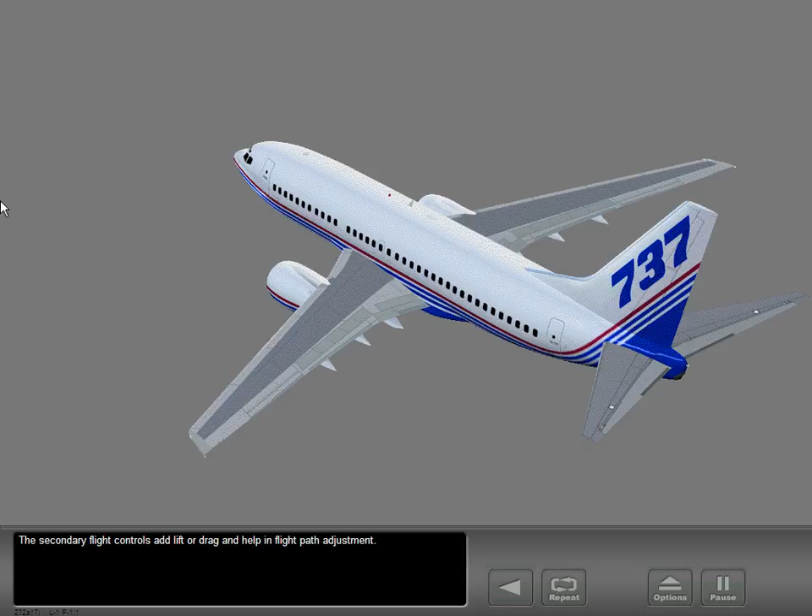The secondary flight controls add lift or drag and help in flight path adjustment. The spoiler's speed brakes help roll the airplane, add drag to slow the airplane, or increase the rate of descent. The leading edge devices add lift for slower approach and landing speeds. The trailing edge flaps also add lift and drag for slower approach and landing speeds.

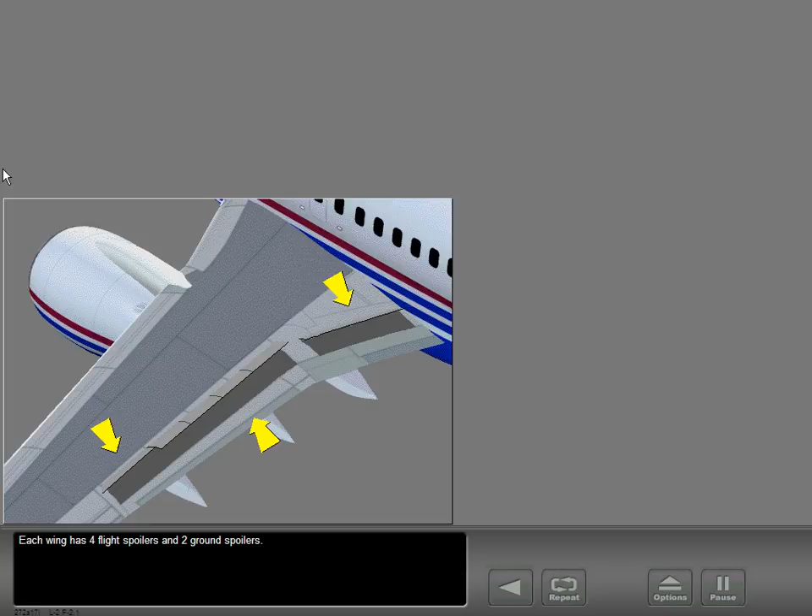Each wing has 4 flight spoilers and 2 ground spoilers. The flight spoilers are operated manually in flight to slow the airplane or increase the rate of descent, or automatically to help the ailerons in roll control.

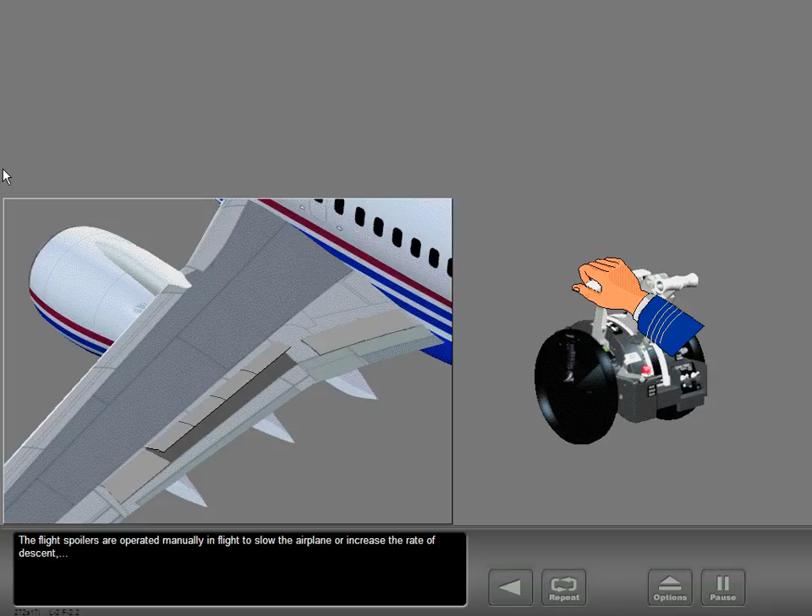You must be careful when you operate the flight spoilers manually and the airplane is turned. The airplane roll rate can quickly increase.

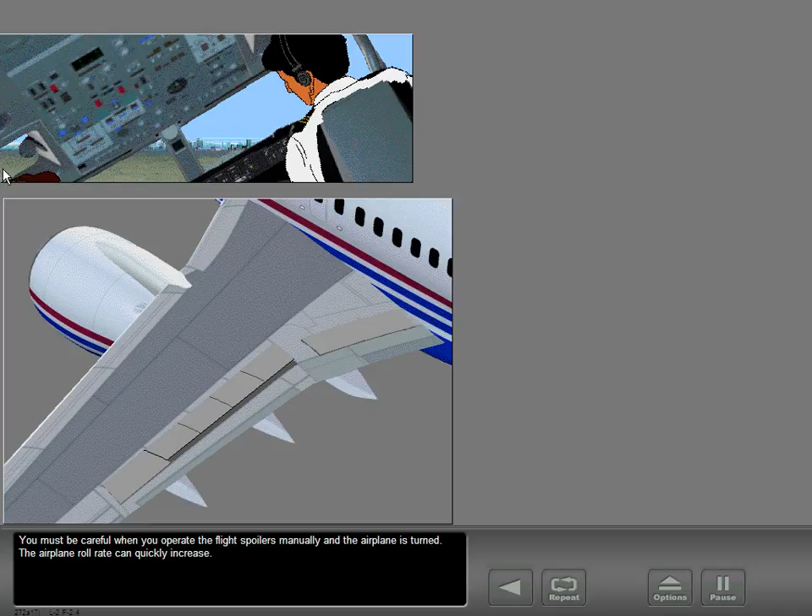The ground spoilers operate with the flight spoilers on the ground. The flight spoilers use hydraulic systems A and B. The ground spoilers use hydraulic system A.

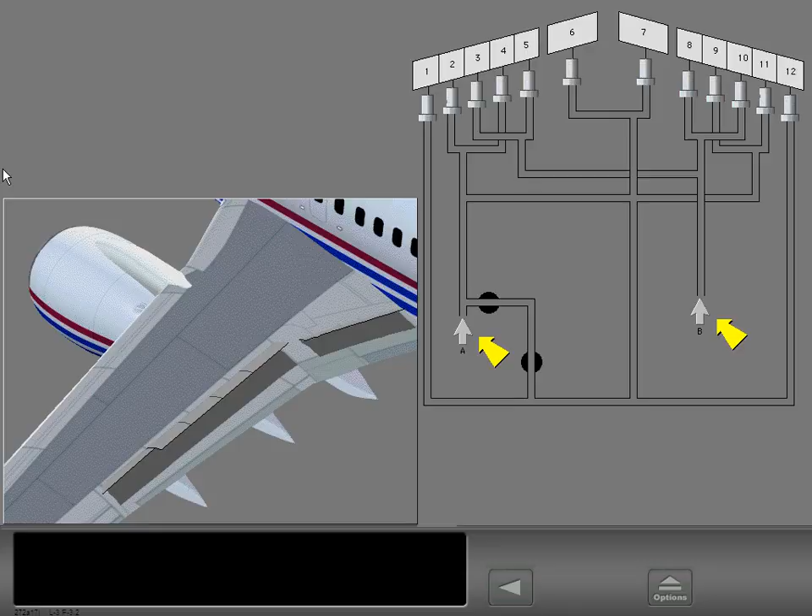The controls and indicators for the spoiler speed brakes are found here. The speed brake lever is on the captain's side of the control stand.

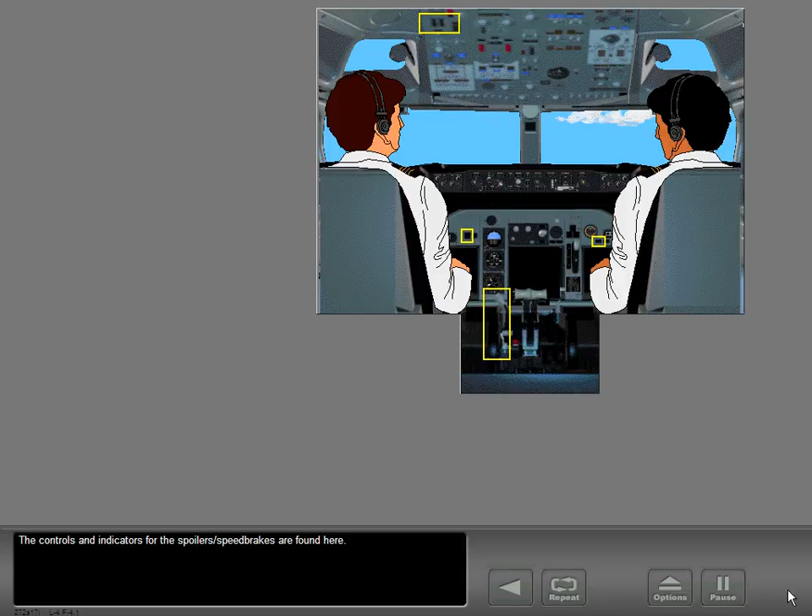In the down detent position, all flight and ground spoiler panels are down. The armed position is for automatic operation. In the flight detent position, all flight spoilers extend to the maximum position.

In the up position, all flight and ground spoilers extend to their maximum position. The up position is used only on the ground.

The speed brake armed light is on the captain's instrument panel and shows that the speed brake system is armed for automatic inputs.

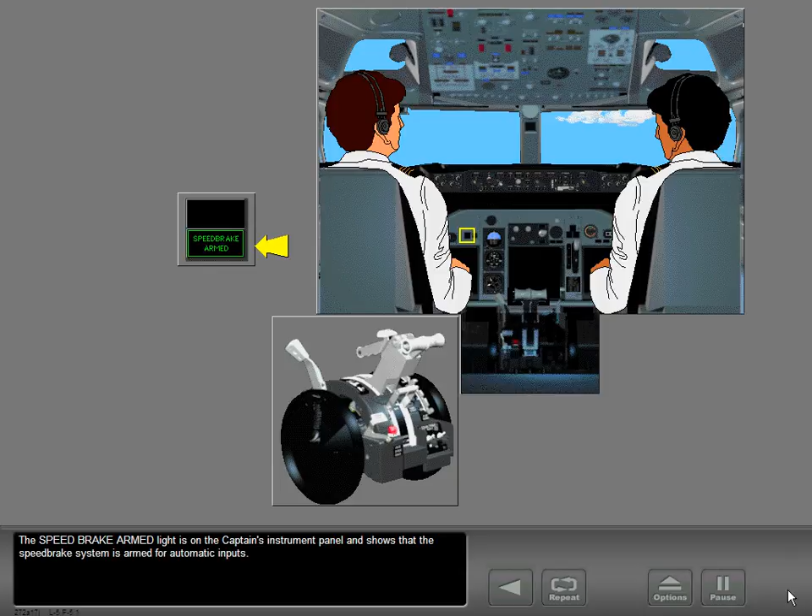The speed brake's extended light on the first officer's instrument panel illuminates in flight when the speed brake lever is out of the armed position and the trailing edge flaps are extended to more than flaps 10, or radio altitude is less than 800 feet.

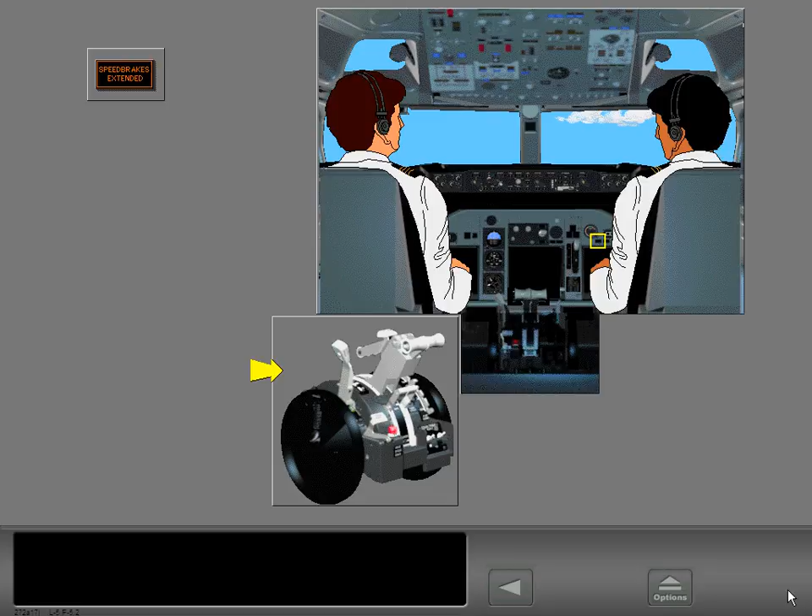The speed brake's extended light illuminates on the ground when the speed brake lever is in the down detent position and the ground spoilers are not stowed.

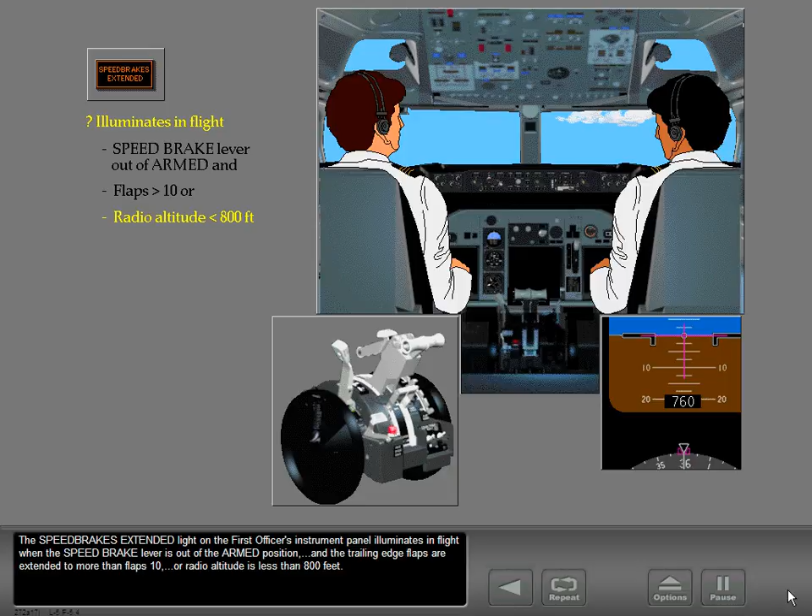The spoilers are set to operate automatically on landing or during a rejected takeoff. To operate automatically on landing, you must have the speed brake lever in the armed position and the speed brake armed light illuminated.

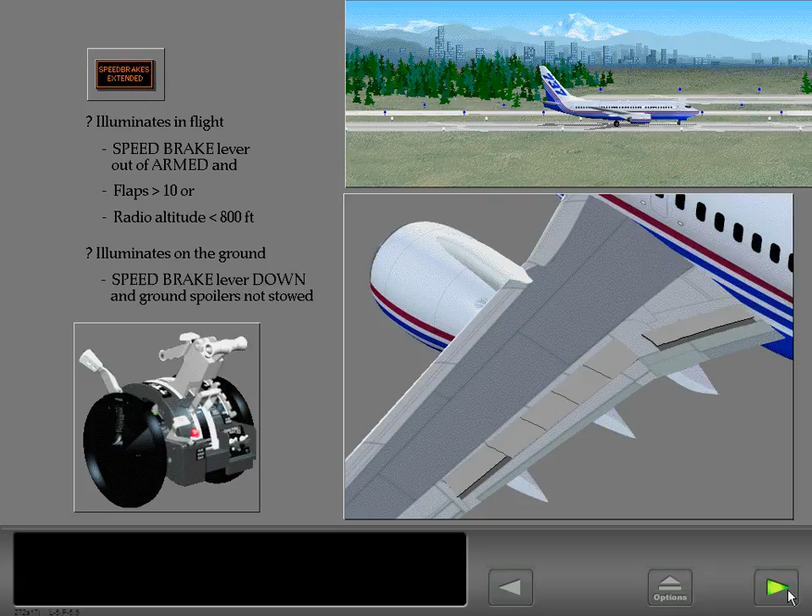The thrust levers in the idle position, a main landing gear wheel speed of more than 60 knots, and a landing gear strut compression.

When the left main, right main, or nose gear strut compresses, the flight spoilers move up. When the right main gear strut compresses, the ground spoilers move up.

During a rejected takeoff, all spoilers operate if the main landing gear wheel speed is more than 60 knots. The thrust levers are in idle, and the reverse thrust levers are moved to reverse thrust.

The spoiler switches on the flight control panel are for maintenance use only.

The leading edge devices and trailing edge flaps are high lift devices that increase wing lift and decrease stall speed during takeoff, low speed flight, and landing.

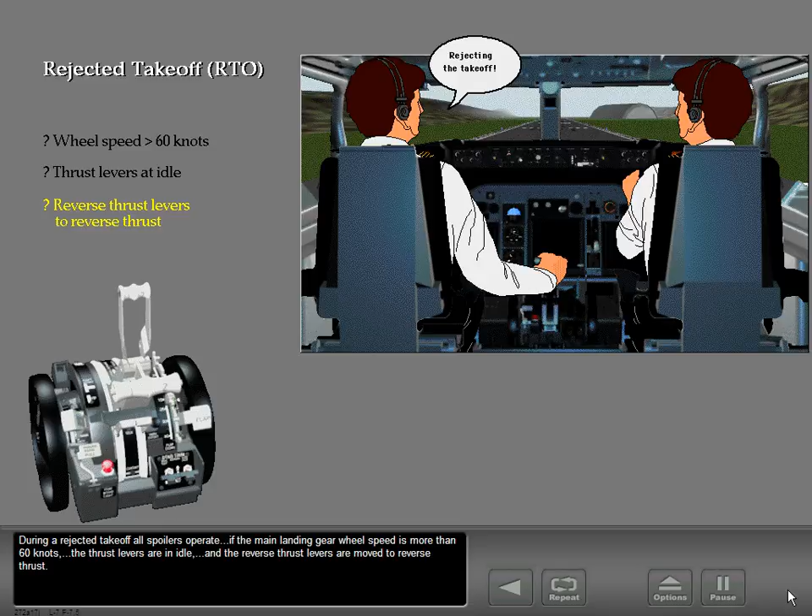The leading edge devices are the leading edge flaps, which have two positions, up and full extended. And the leading edge slats, which have three positions, up, extended, and full extended. The trailing edge flaps are double slotted.

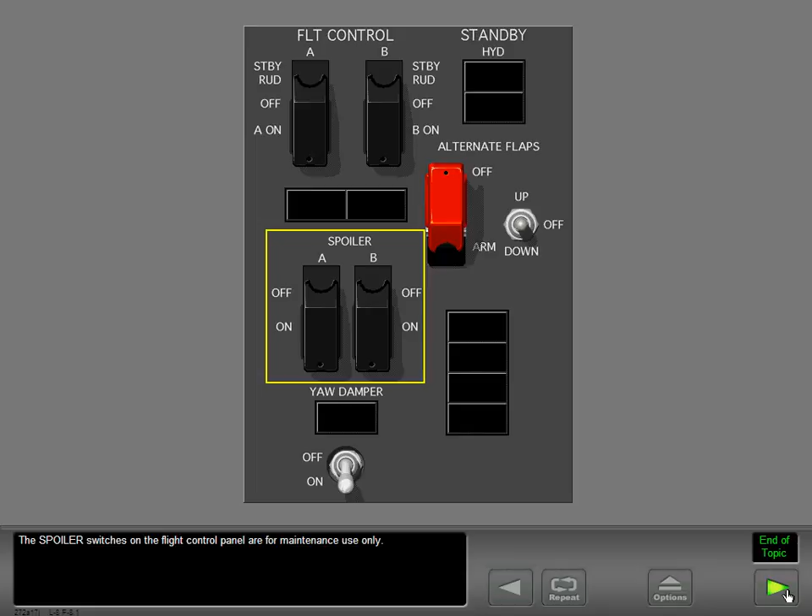Extension of the leading edge devices occurs in sequence with the movement of the trailing edge flaps. The leading edge devices and trailing edge flaps use hydraulic system B.

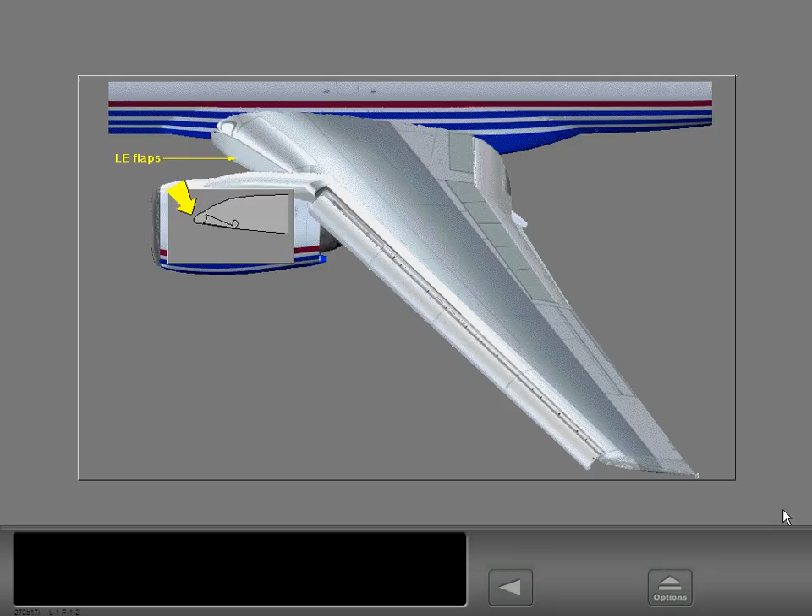The standby hydraulic system is the alternate source for extension of the leading edge devices. An electrical motor is the alternate system for extension and retraction of the trailing edge flaps. Alternate flap and slat operation is discussed in a different lesson.

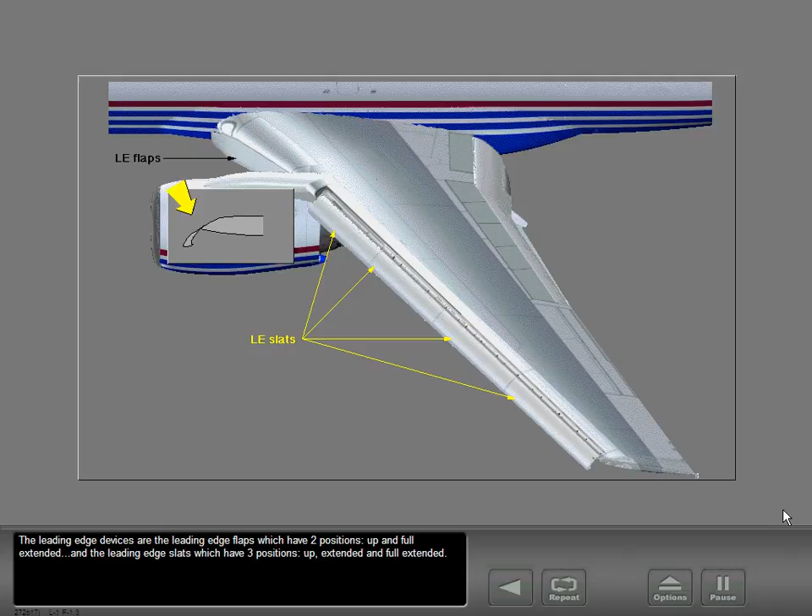The flap lever is on the first officer's side of the control stand. When the flap lever moves, the trailing edge flap control and leading edge control operate, and hydraulic pressure goes to the trailing edge drive unit and the leading edge slats.

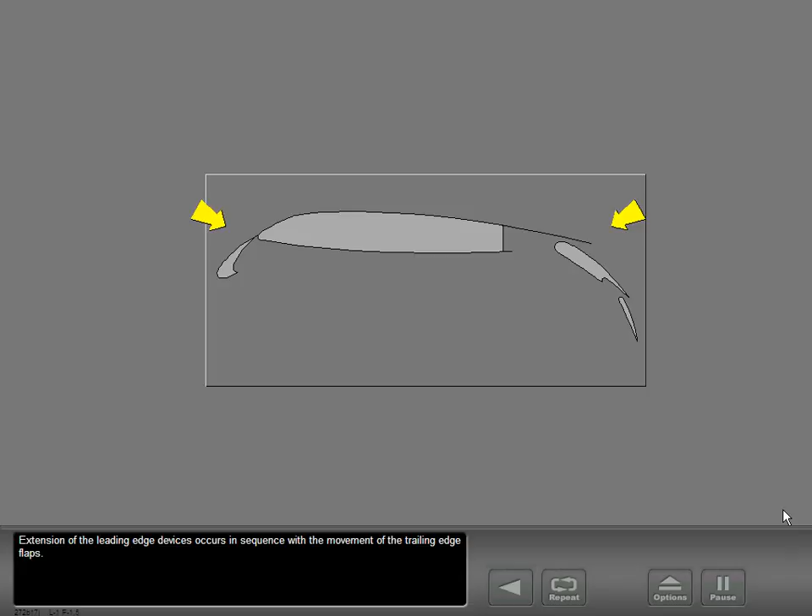The flap position indicator shows the trailing edge flap positions. Flap gates prevent accidental movement through position 1 during a single engine go-around and position 15 during a normal go-around. The flap's limit placard shows the maximum speed for each flap position.

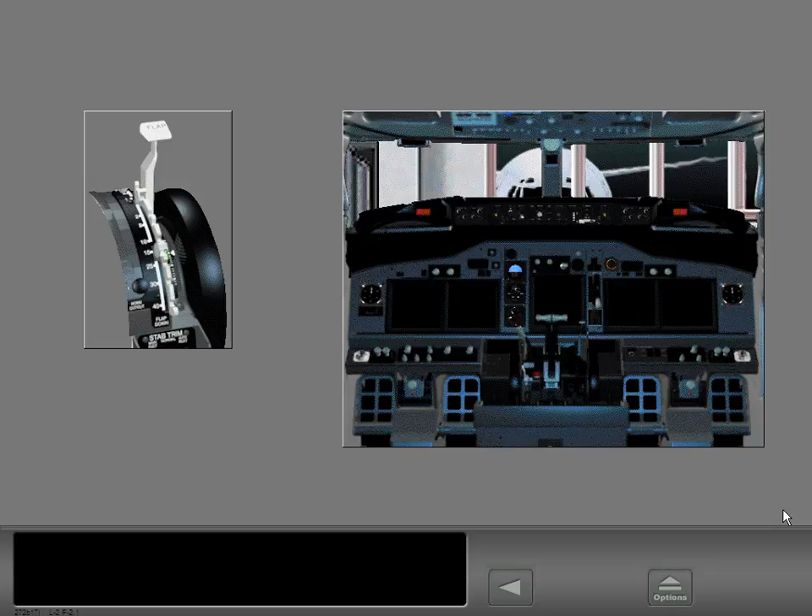The Flap Slat Electronics Unit, or FSEU, supplies trailing edge flap load relief from higher than normal airspeed for flaps 40 and 30. The FSEU tells the flaps to retract from 40 to 30 if the airspeed is more than 163 knots.

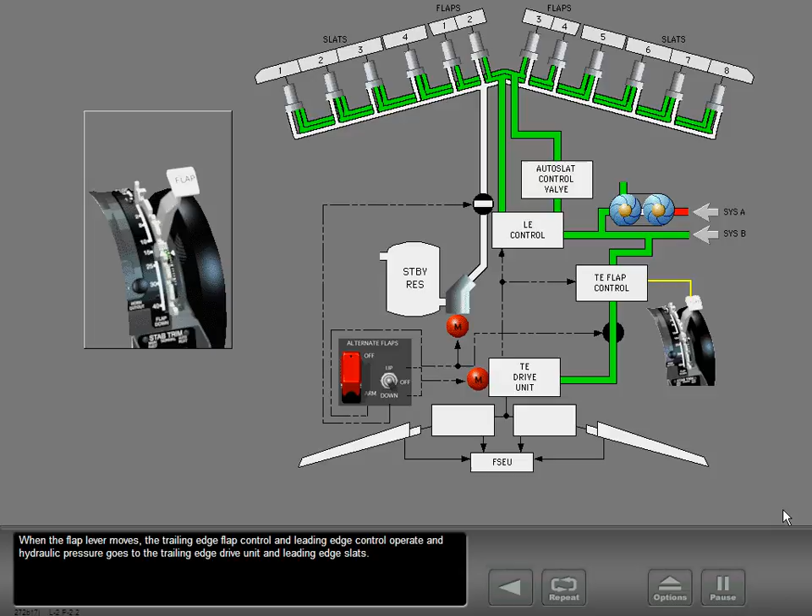When the flap lever is set to 30, the flaps retract to 25 if the airspeed is more than 176 knots. The flap lever does not move, but the flap position indicator shows the retracted position.

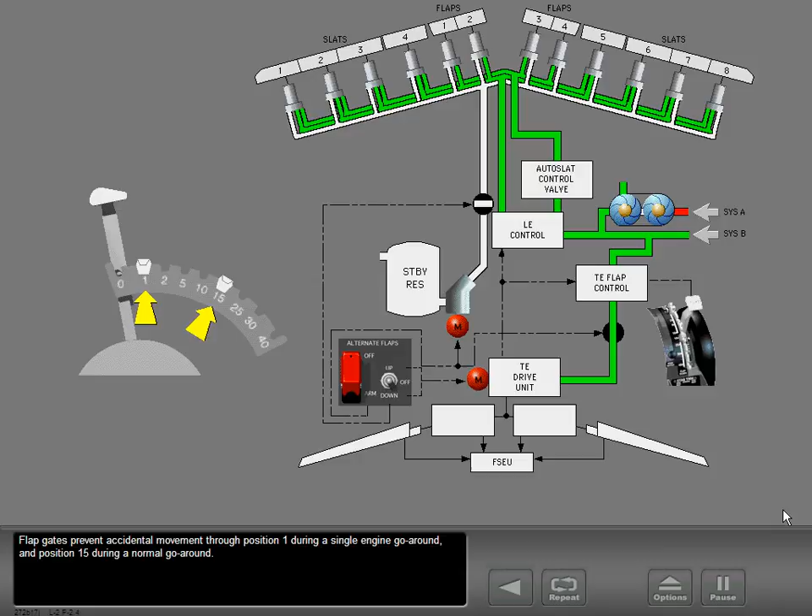The flaps extend to the set position when the airspeed decreases below 158 knots for flaps 40 or below 171 knots for flaps 30.

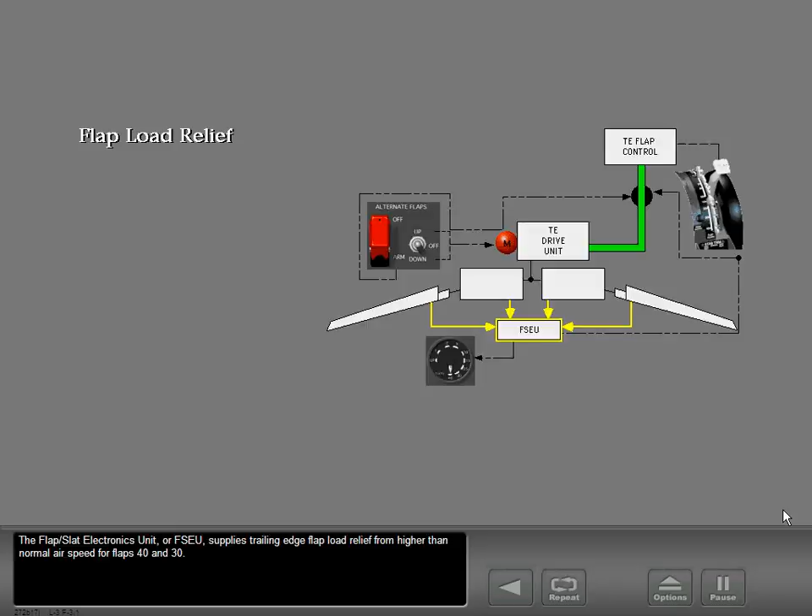Indications for the leading edge devices are on the center instrument panel and the aft overhead panel. The leading edge devices annunciator panel shows the position of each leading edge flap and slat. The leading edge flap transit and extended lights show the condition of the leading edge devices.

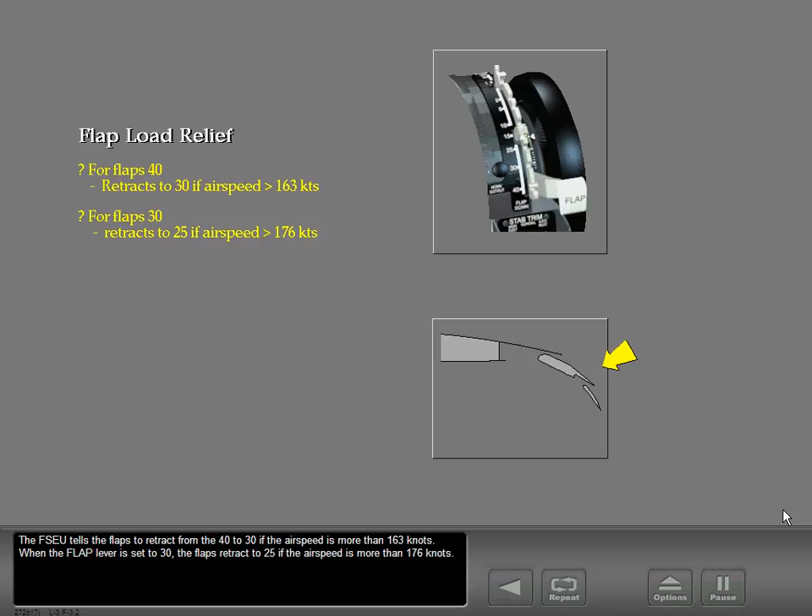When all the lights extinguish, the devices are retracted. The amber leading edge devices transit lights and leading edge flaps transit light illuminate when the leading edge devices are in transit or not in the correct position.

The green leading edge devices extended or full extended lights illuminate when the leading edge devices are in the correct position.

The leading edge flaps extended light illuminates when the leading edge flaps are in the full extended position and the slats are in the extended position. Or the leading edge flaps and slats are in the full extended position.

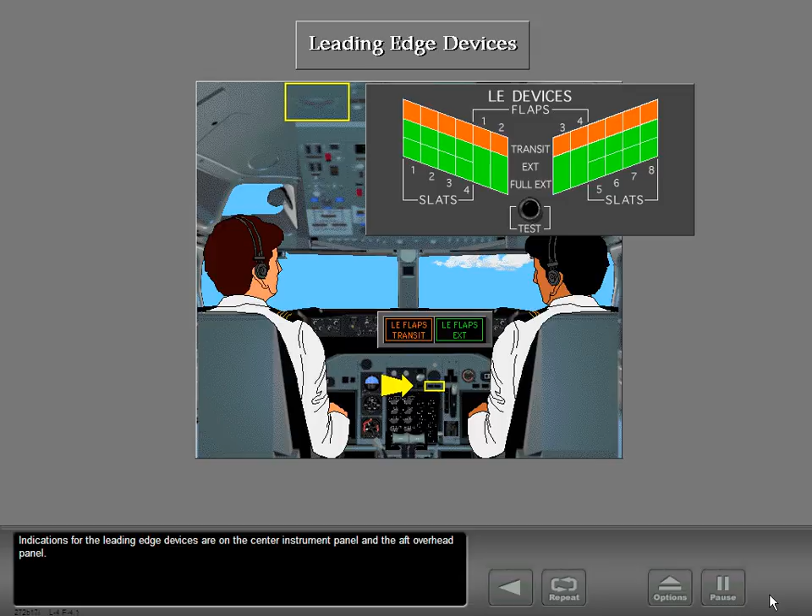Push and hold the test switch. The test switch illuminates all annunciator panel lights.

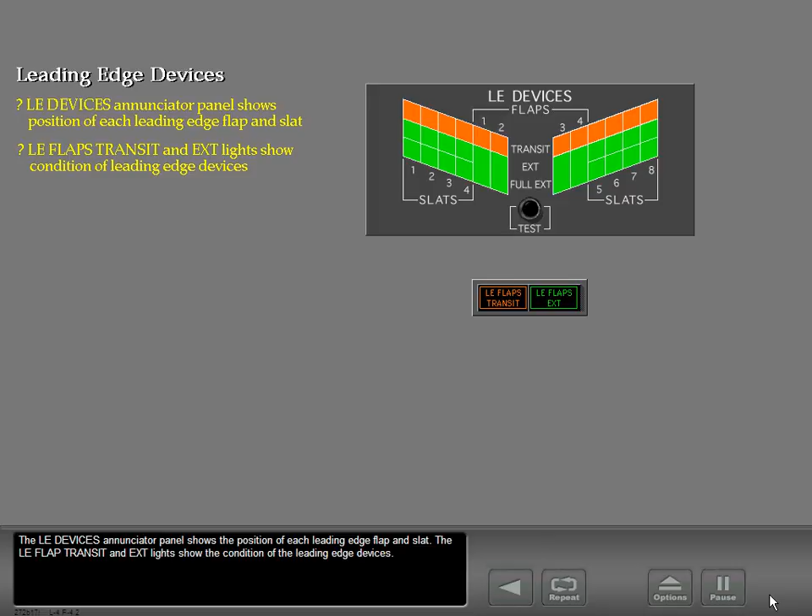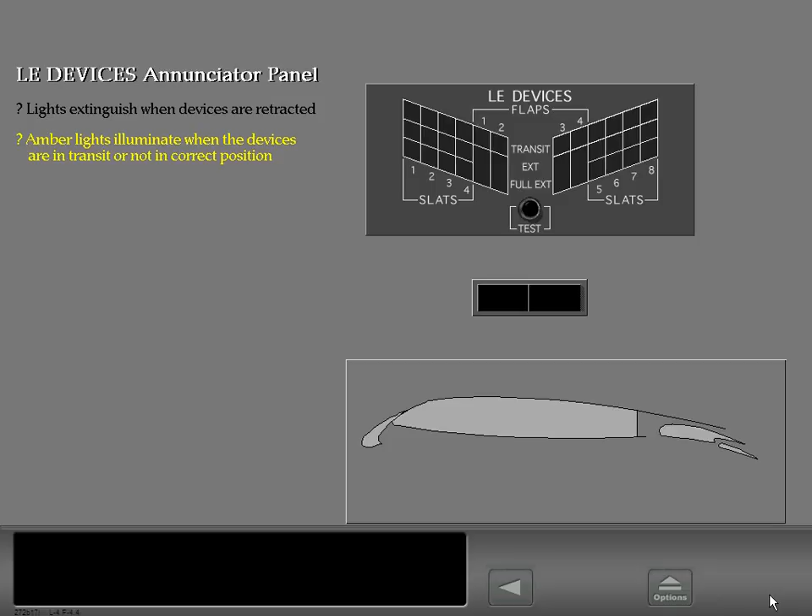The auto-slat system increases wing lift if the airplane approaches a stall during takeoff or approach to landing. With the trailing edge flaps set at 1, 2, or 5, the auto-slat system moves the leading edge slats from extended to the full extended position before stick shaker. The slats move back to the extended position when the pitch angle is below the stall attitude.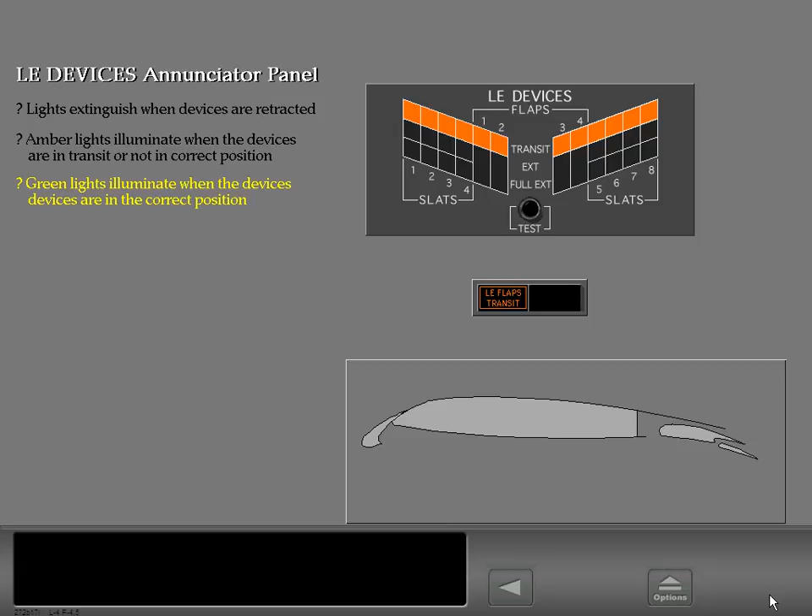The auto-slat system uses hydraulic system B. If pressure from the hydraulic system B engine-driven pump is not sufficient, the power transfer unit, or PTU, uses hydraulic system A to pressurize system B for auto-slat operation.

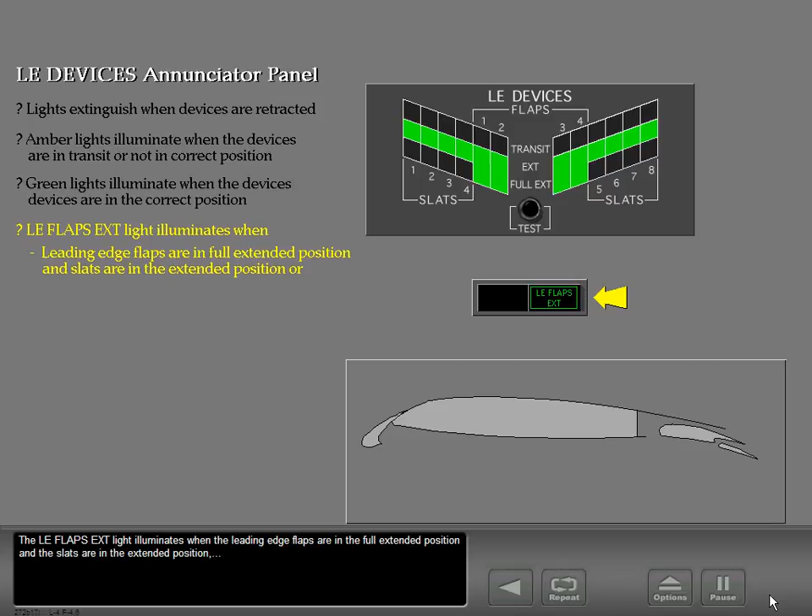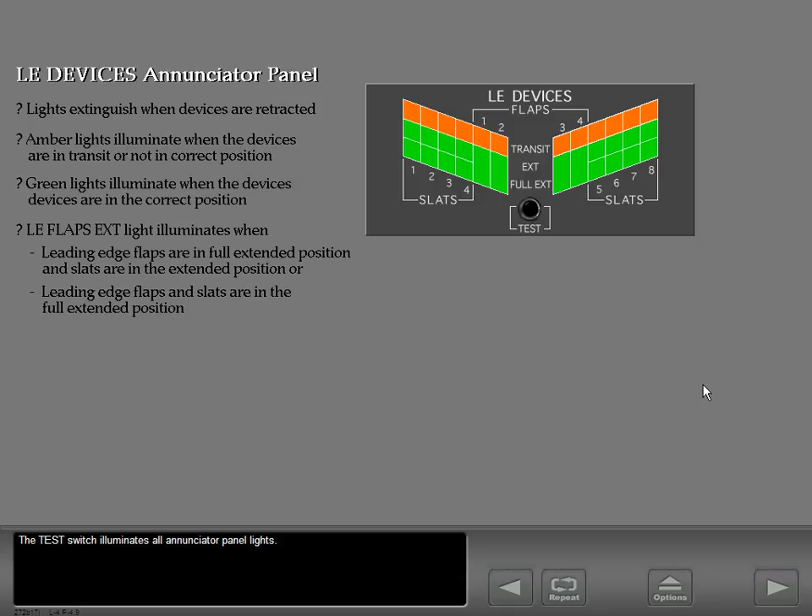Let's look at a flap extension sequence. Set flaps 5. When the flap lever is set at 5, the trailing edge flaps move from the up position and the leading edge devices start to extend. The leading edge flaps transit light and leading edge devices transit lights illuminate. When the trailing edge flaps near the 1 position, the leading edge flaps are at full extended. The slats are at extended, and the leading edge flaps extended light illuminates.

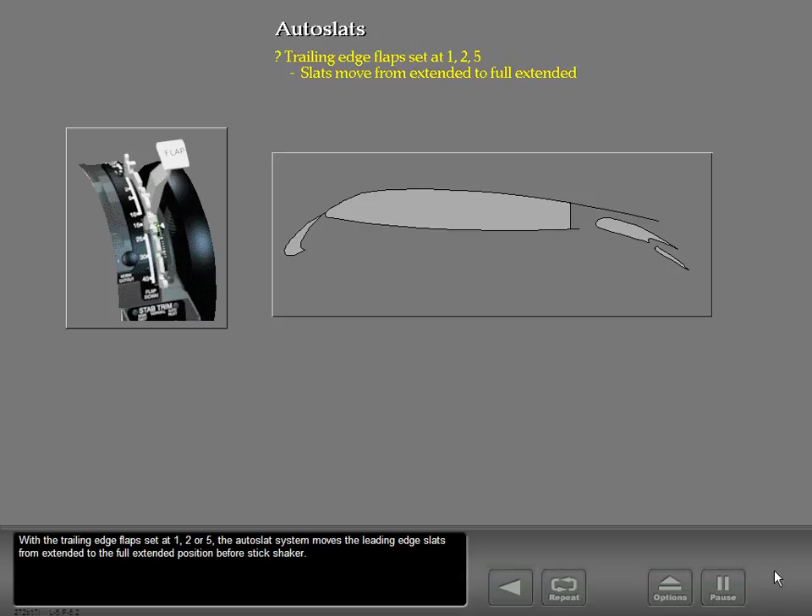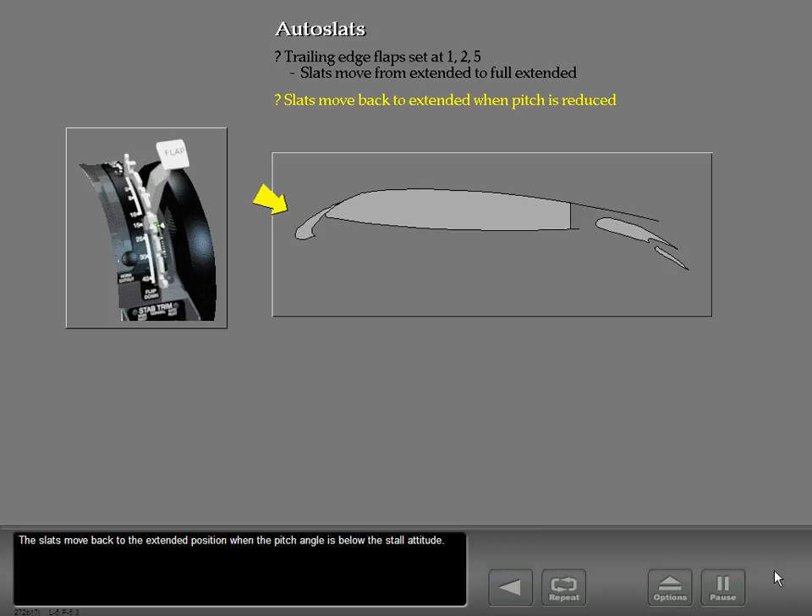Set flaps 40. When the trailing edge flaps move from flaps 5 to flaps 10, the slats move to full extended. The lights again show in transit and then full extended. Only the trailing edge flaps continue to extend from flaps 10 to flaps 40.

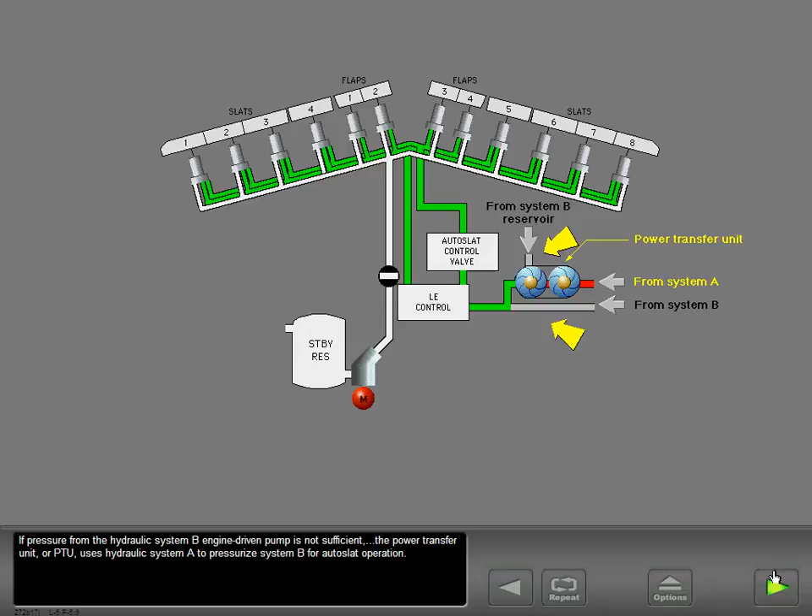Let's look at the non-normal conditions related to secondary flight controls. The speed brake do not arm light is on the captain's instrument panel and shows the automatic speed brake system is inoperative. During the landing roll, you must manually move the speed brake lever to up.

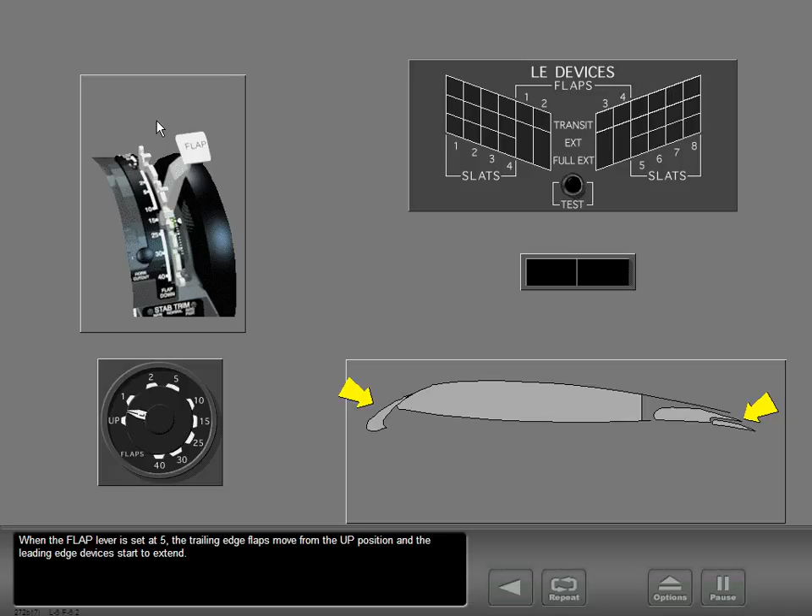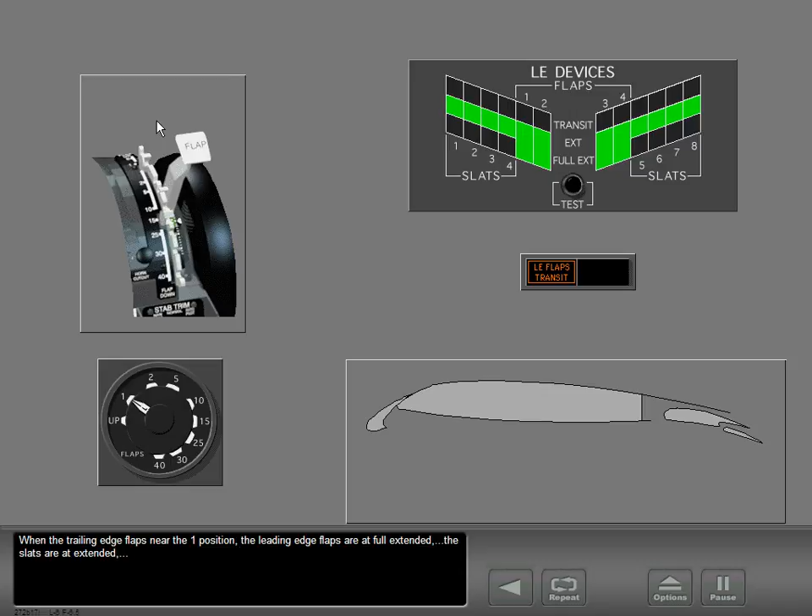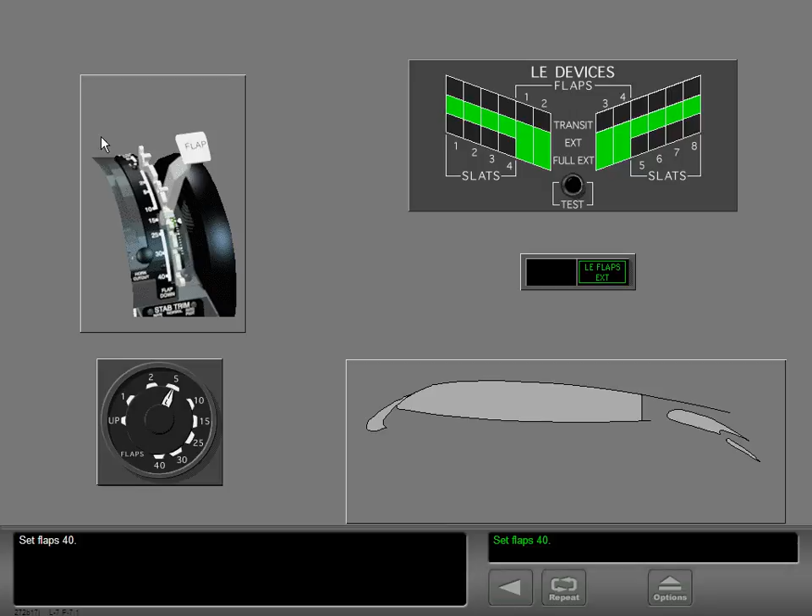The auto-slat fail light illuminates when the auto-slat system is not available. The flight controls system annunciator and master caution lights illuminate. Reset the master caution system. A failure of a single SMYD channel illuminates the auto-slat fail light, flight controls system annunciator, and master caution lights when the master caution system recall is activated. No crew action is required for an auto-slat system failure.

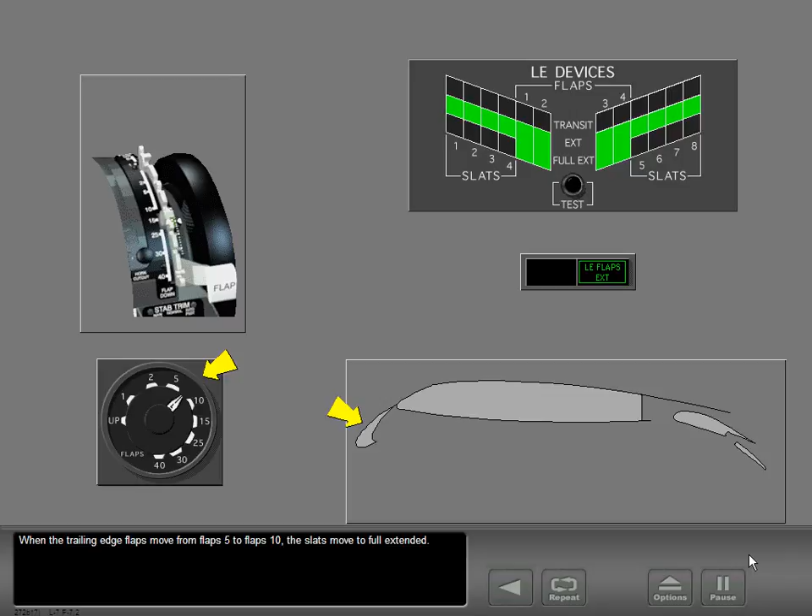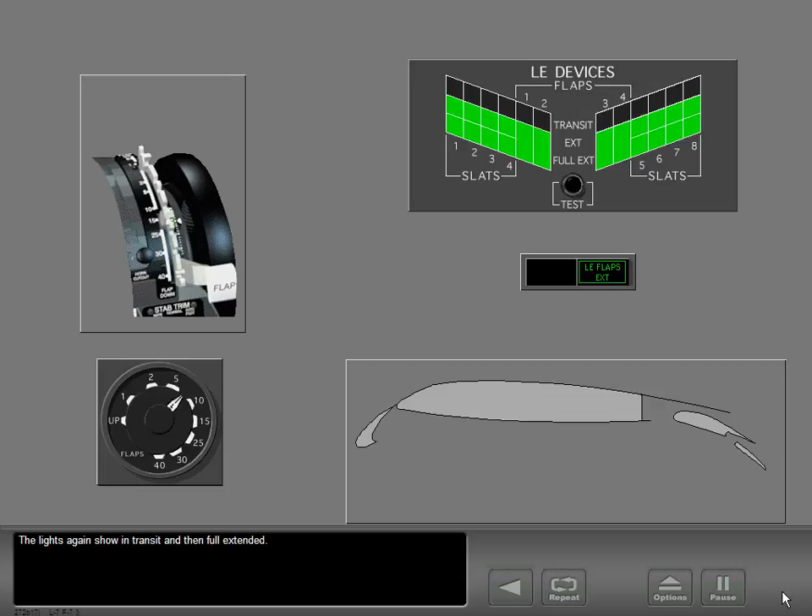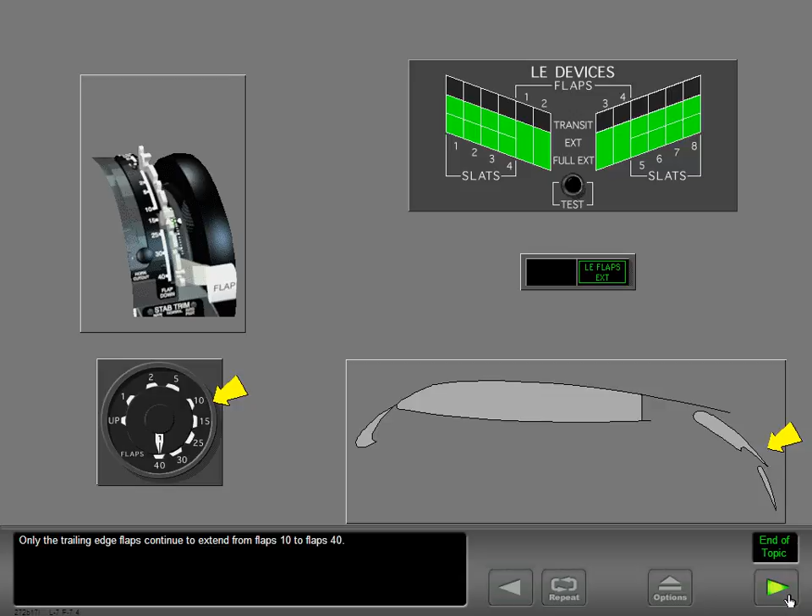If hydraulic system B does not operate, the standby hydraulic system is the alternate source for extension of the leading edge devices, while an electrical motor is the alternate system for extension and retraction of the trailing edge flaps. The alternate flaps master switch and position switch control the alternate flap system.

Open the guard and move the master switch to arm. When the alternate flap master switch is in the arm position, the alternate flaps position switch is armed. The standby hydraulic pump turns on, and the trailing edge flap bypass valve closes.

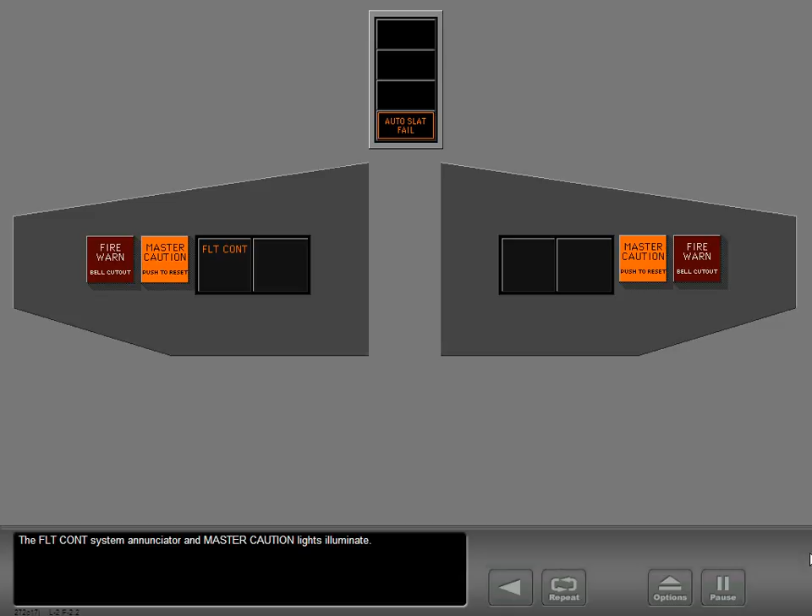Next, move the alternate flaps position switch to down. In the down position, the standby hydraulic system moves the leading edge flaps and slats directly to the full extended position, while an electric motor extends the trailing edge flaps. The down position is spring-loaded and must be held until the flaps reach the correct position.

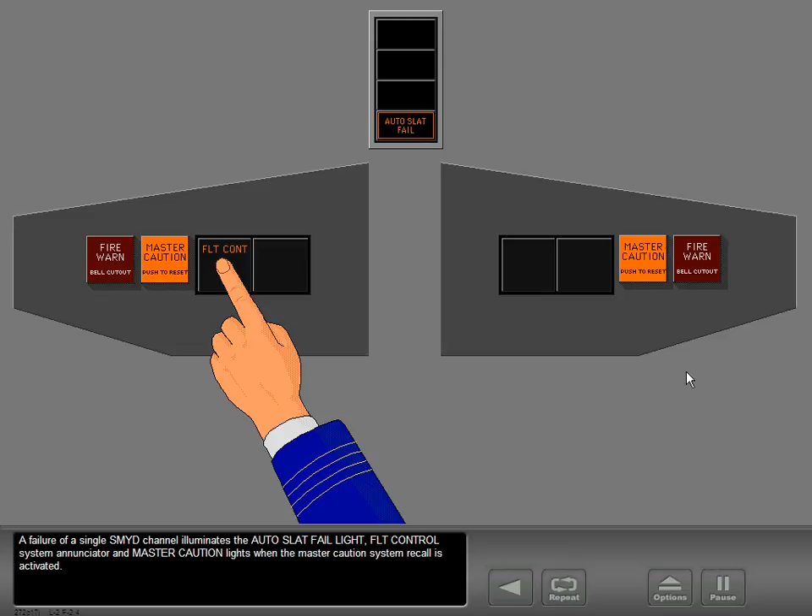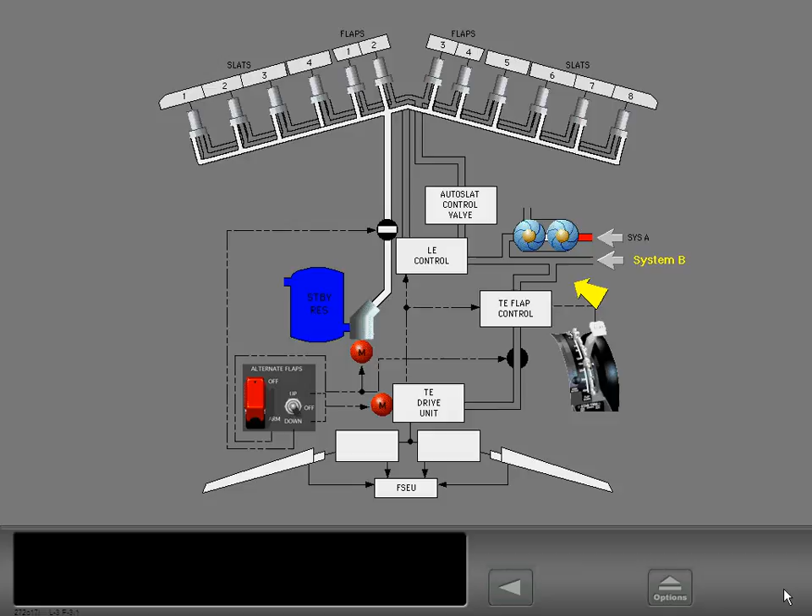Trailing edge flap extension is slow and can be as long as 2 minutes for the flaps to move from up to flaps 15. To retract the trailing edge flaps, move the alternate flaps position switch to up. The up position is magnetically held. Leading edge flaps and slats stay fully extended and cannot be retracted by the standby hydraulic system.

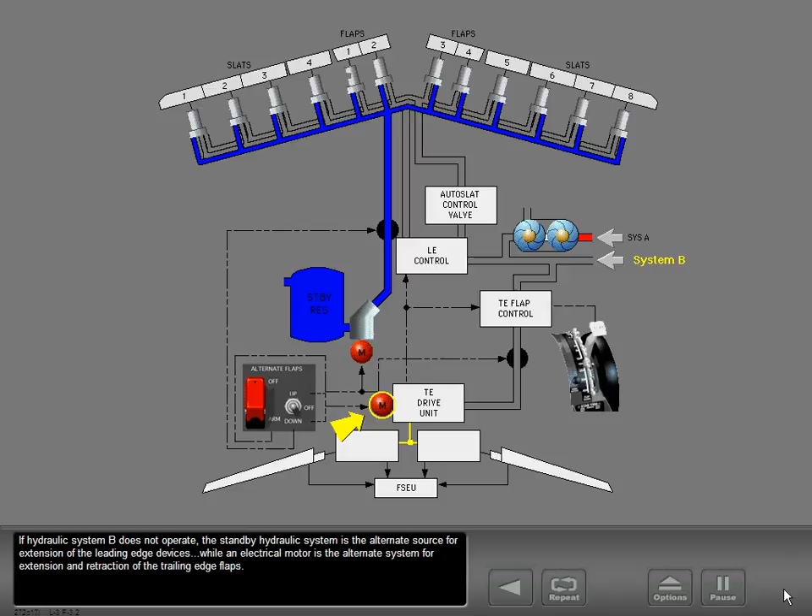The FSEU monitors the trailing edge flaps for asymmetry and skew conditions, the leading edge devices for an incorrect position, and the leading edge slats 2 through 7 for a skew condition. A flap asymmetry occurs when a flap on one wing is not aligned with the same flap on the other wing. A skew condition occurs when the two drives for a flap or slat panel do not operate at the same rate and cause the panel to twist during extension or retraction.

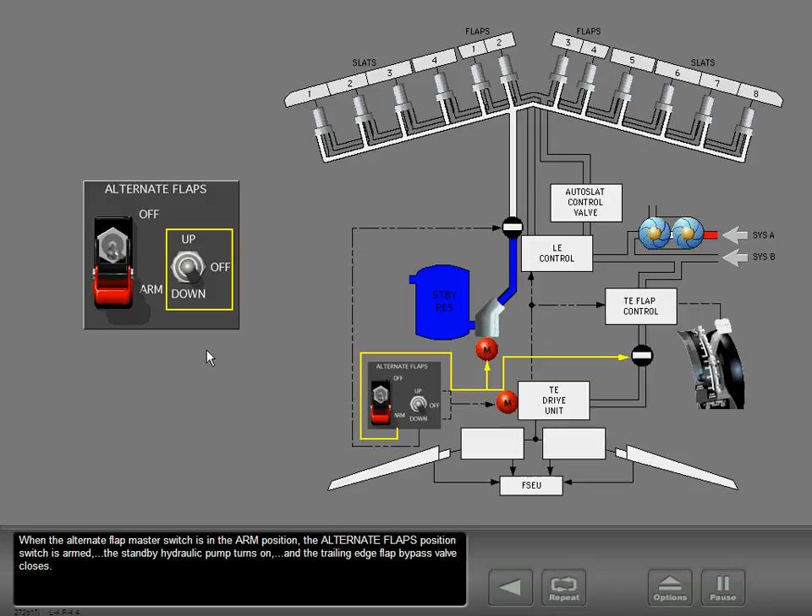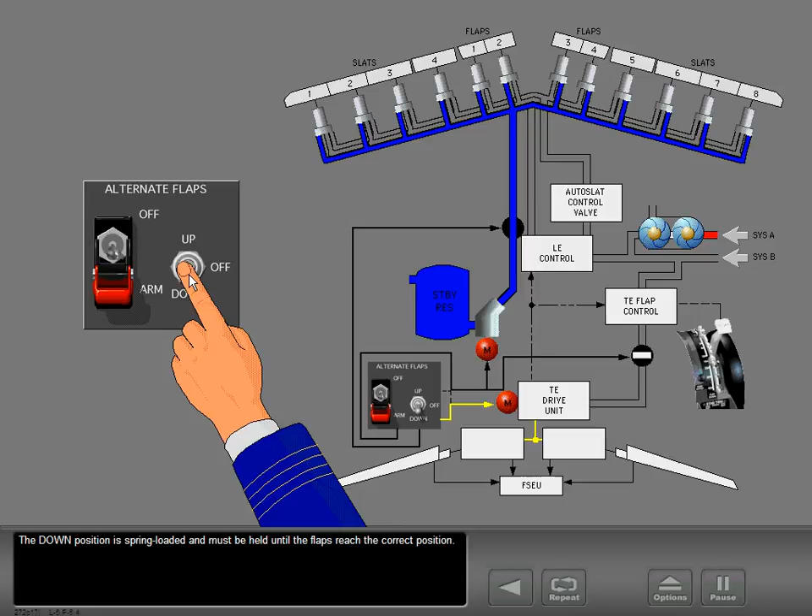When the FSEU senses a trailing edge asymmetry or skew condition, the FSEU closes the trailing edge bypass valve and you see a needle split on the flap position indicator. If an asymmetrical trailing edge flaps condition exists, do not attempt to move the trailing edge flaps with the alternate flaps position switch. There is no asymmetry or skew protection when the alternate flap extension system is used.

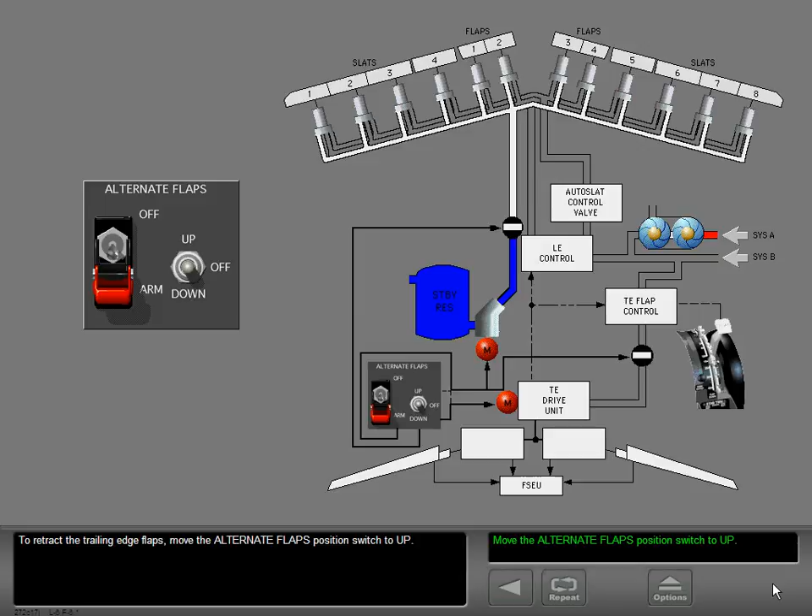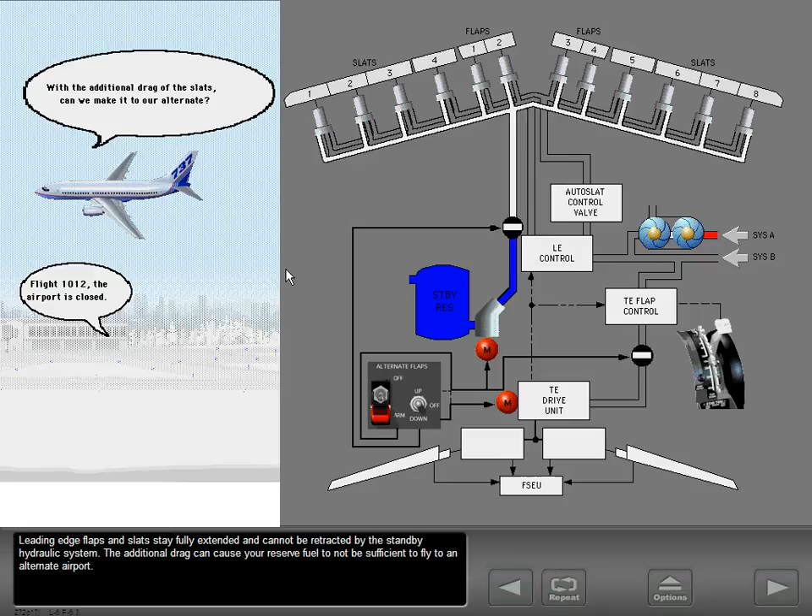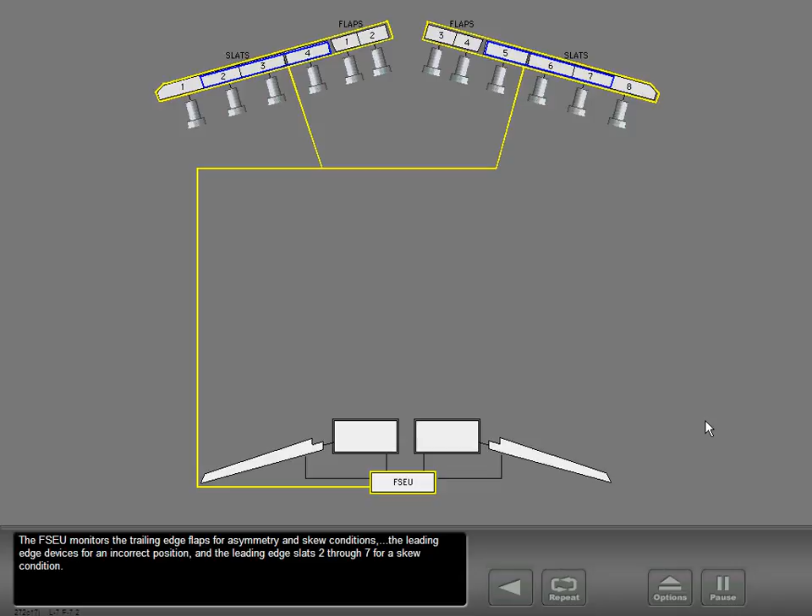When the FSEU senses a leading edge flap or slat not in the correct position, or a leading edge slat skew condition, the leading edge flap's transit light stays illuminated. And one of these indications is shown on the leading edge device's annunciator panel: an amber transit light illuminates, an incorrect green extended or full extended light illuminates, or no lights illuminate. There is no skew detection for the leading edge flaps or slats 1 and 8, and a slat skew is not monitored during autoslat operation.

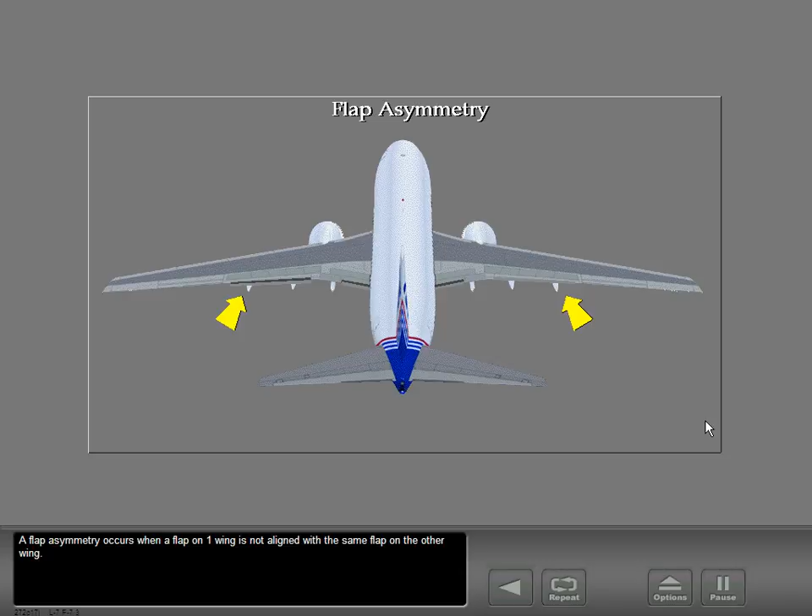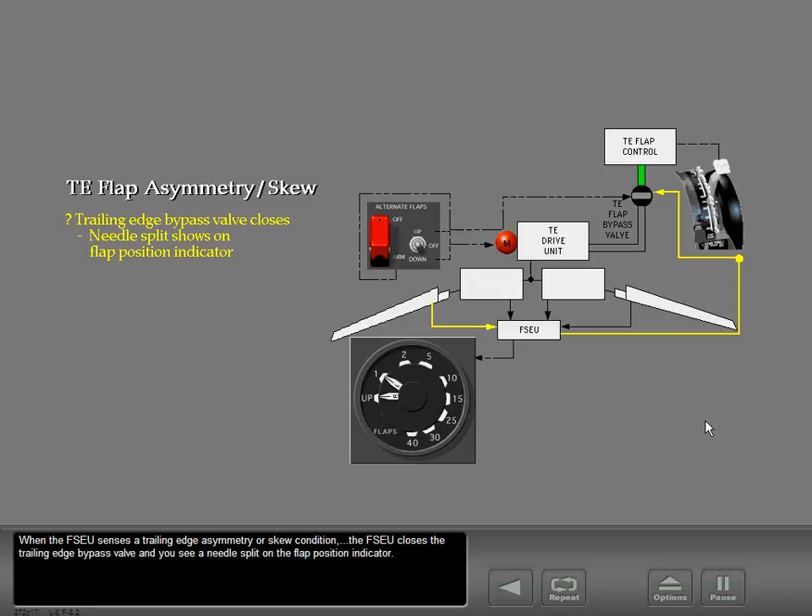The FSEU also monitors uncommanded motion of the leading edge devices or trailing edge flaps. Uncommanded motion for a leading edge device occurs when the trailing edge flaps or autoslats are not commanded, and two leading edge flaps move on one wing, or two or more slats move on one wing. In this example, the flaps are up and two slats moved. The amber leading edge flap's transit light illuminates, the FSEU stops the operation of the leading edge control, and the leading edge device is held where it is.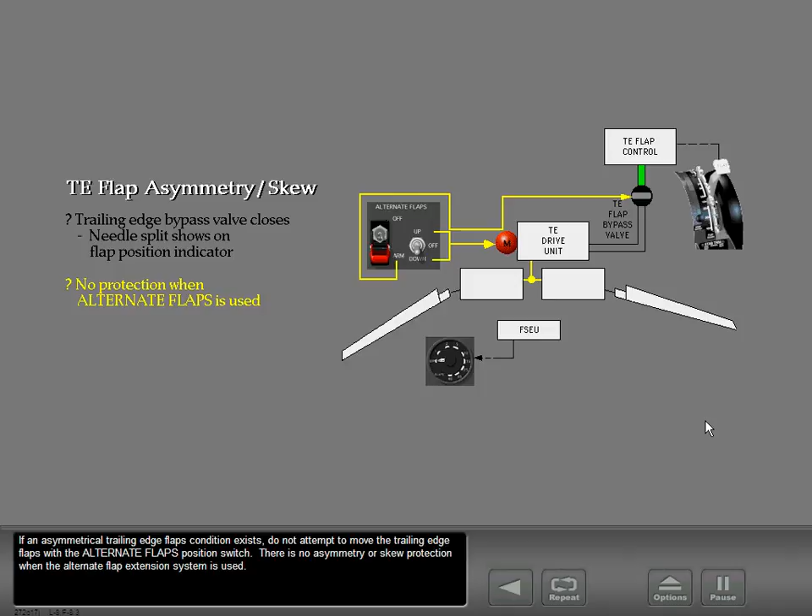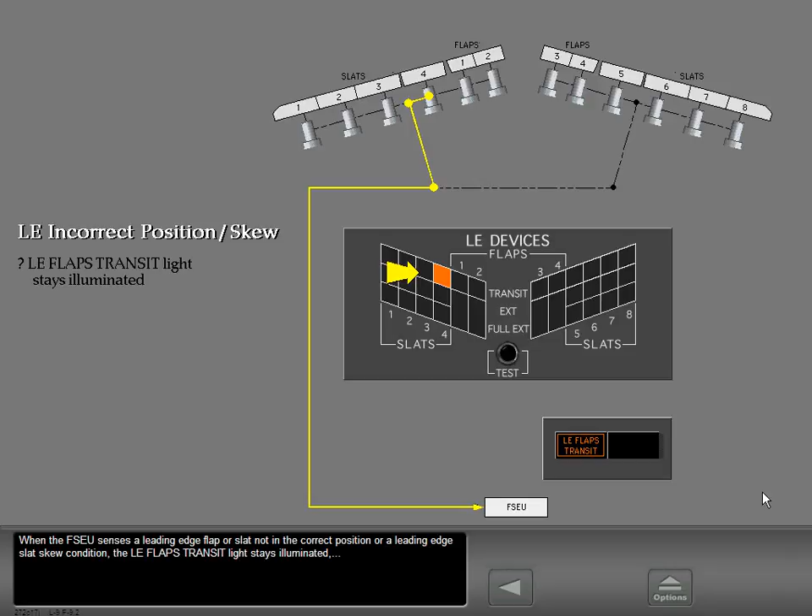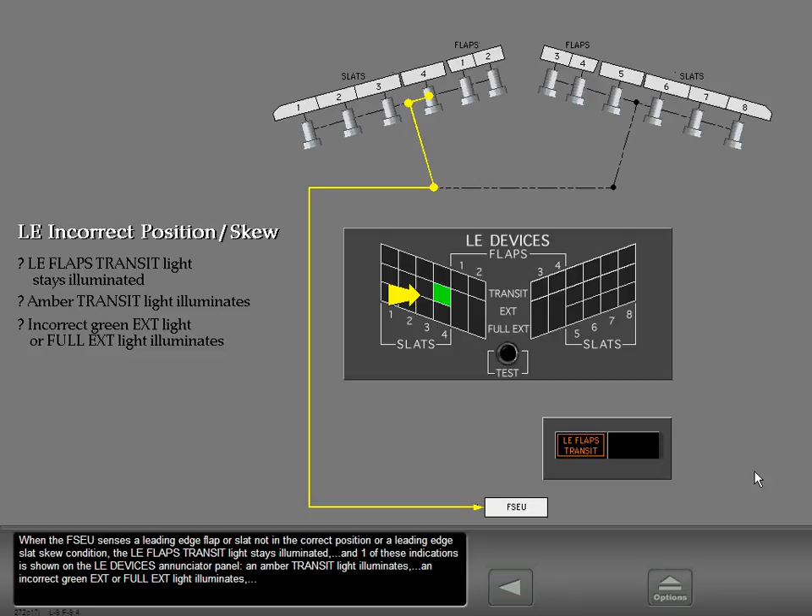Alternate flaps is used to control the trailing edge flaps because the flap bypass valve cannot be reset by the flight crew. Remember, there is no asymmetry or skew protection when the alternate flap extension system is used.